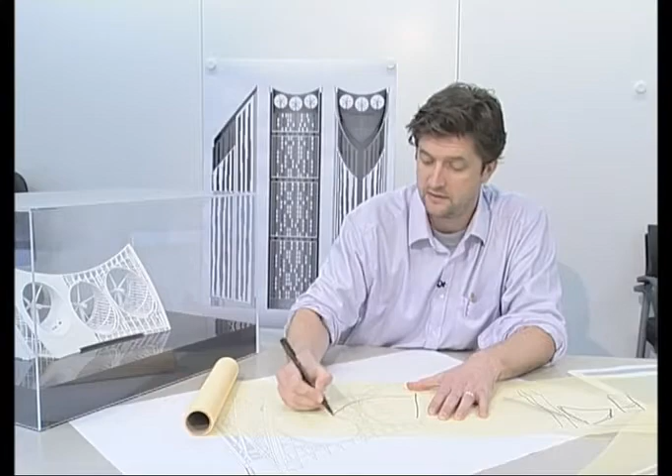Once we'd looked at the different options that were available for renewable technologies, we chose to go down the wind route. There were a number of interesting factors that all started pointing towards wind. One, the speed of wind actually increases exponentially as you get up in height. So remember, we're 150 metres in the air. So the wind speed is like 5 times more here than it is at ground level.

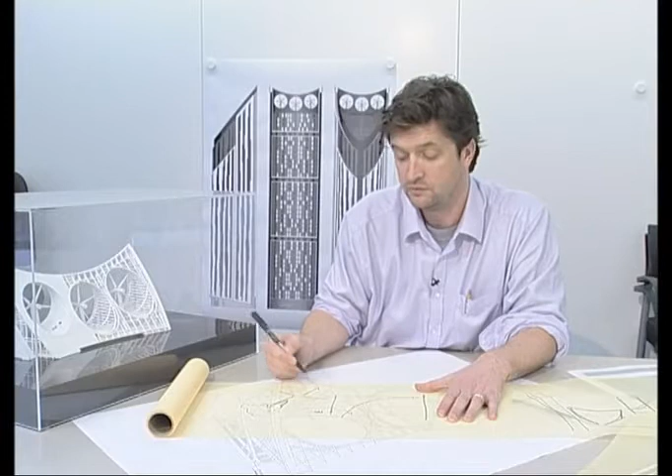The other interesting thing was that if you take the wind rose for London, the majority of wind comes from the southwesterly direction. Now, as it would happen, that curve at the back of the building that I've just shown you, along here, faces due southwest. So the whole back of the building acted like a sail, and it trapped the wind, and when the wind hits that sail, it pushes down and up. So it's actually getting channeled up towards the top of the building as well.

In the early meetings, we were just looking at ways in which we can use renewable energy, looking at all the options. I remember almost the very moment the idea of the turbine was born. I was sitting next to the architect and he was sketching away and just drew this huge turbine at the top of the building and just raised his eyebrows at me to say, can we do that? And without any analysis or anything like that, I just nodded, I'm sure we can make that work, and that's how it was born. And we went from there, really.

The key thing was to incorporate the turbines within the fabric of the building. It would have become tokenism, if you like, to just plonk them on top. There are other examples of where that had happened elsewhere in the Elephant and Castle, and basically we wanted to adopt them as part of a motif of the building.

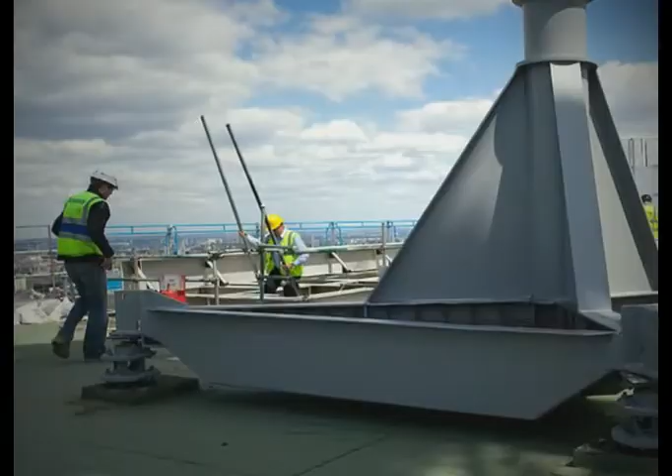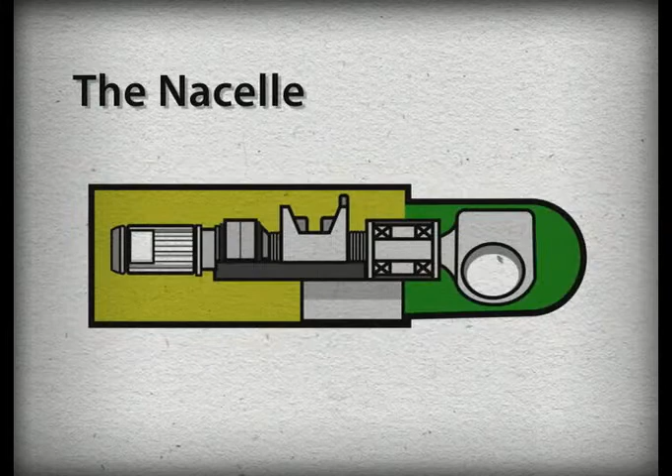Each of the 3 9-metre diameter turbines is a horizontally mounted propeller consisting of a heavy steel and concrete inertia base. Anchored to the base is a 500mm diameter, 6mm thick steel mast that is tilted 12.5 degrees forward to ensure the blade tips can't hit the mast. And fixed to the mast is the nacelle. The nacelle houses the turbine's generator, its gear, the braking systems, and all the couplings and cables. And finally, the hub, which houses the main shaft and bearings and the blade mounts for 5 blades.

But why 3 turbines? The reason we have 3 turbines at the top of the building is 2 factors. One, as I explained earlier, the overall height of the building had been dictated by this view. The quantum of floor space had been dictated by the client. That left us with a space between here and here in which to put the turbines. It's true to say that the output of turbines is exponential as well.

The bigger the diameter, the greater the output, so there's an exponential curve on that. And we could have had one 15-metre diameter turbine and we would have got the same output as the 3 turbines here, but we were sandwiching what we could in between 2 defined criteria. That's where we ended up with 27 metres of turbine.

We tested the performance of the available wind energy by using CFD, that's computational fluid dynamics. That's sophisticated computer modelling to look at the airflow regimes around the building and the additional air velocity that went actually through the turbine areas. The turbine areas are actually 9-metre diameter, but we've got a Venturi type effect by smoothing the entry points slightly on each of the turbines themselves, so they essentially capture and smooth the air through and accelerate across the turbine blades, therefore improving the performance and efficiency.

In fluid dynamics, a Venturi effect occurs when flows are constricted. At the point of constriction, the pressure differential causes a rise in velocity of the fluid. This is what was envisaged would happen in the tubes housing the rotors, but at Strata, the top of the building is sliced off, and the turbine tubes are too short to generate a true Venturi effect.

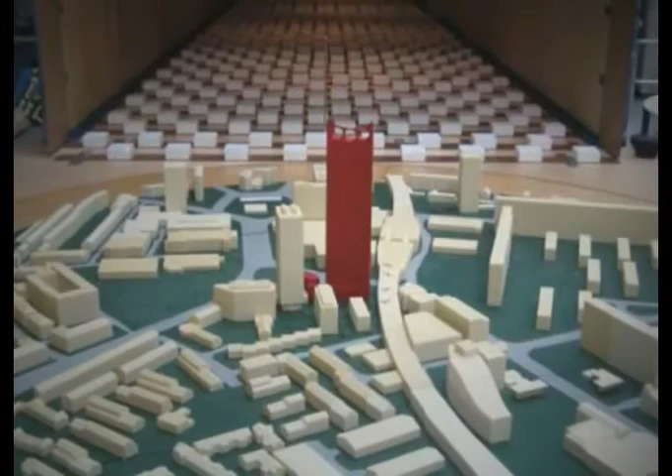Through testing, it was found that 5 blades, as opposed to 3 or 4, was the best performance in terms of lowest noise and the most efficient generator as well. There's a balance always between noise, efficiency, peak performance and cost. 5 blades will clearly cost more than having 3, but then the other issues need to be weighed up as well. One of the issues was what happens if the blades break and come off.

If you've got a wind farm out in the middle of a moor, that's not highly populated, and that's one thing. If you've got a load of people around, that's another. That was looked at very seriously, clearly, and that's resolved by having a steel strand down the centre of the blade, so that if the blade was to fail, then it's actually held in position. And there are all sorts of vibration monitors in the turbine itself as well, which identify if there's a problem, and brakes go on. There's at least an electric brake and a disc brake, so that the whole thing can be stopped fairly quickly if there's any sort of issue.

There is noise. We have an advantage that we have enclosed them within the Venturi-like enclosures. That tends to basically contain the noise into 2 sound cones, one that projects to the north of the building, one that projects to the south. If you've got a conventional wind turbine on a sort of wind farm, the noise would emanate spherically.

Basically, each wind turbine sits on an inertia base, akin to putting a concrete block in the bottom of a washing machine. It dampens the movement. So that inertia base is anchored to the structural slab. It's separated vibration-wise through a series of inertia pads that are adjustable. And basically a safety factor of 10 was built into it, so that whatever the acoustic eventuality was likely to be, we then designed for 10 above that.

This little model here is a model that we used initially to describe to the client and to all the other parties involved in this design how we'd actually build this thing. Because obviously nobody had done this before, and by seeing a 3-dimensional model you can actually understand how this whole thing comes together. Initially when you show sketches, they say that's fine, but how do we actually build it?

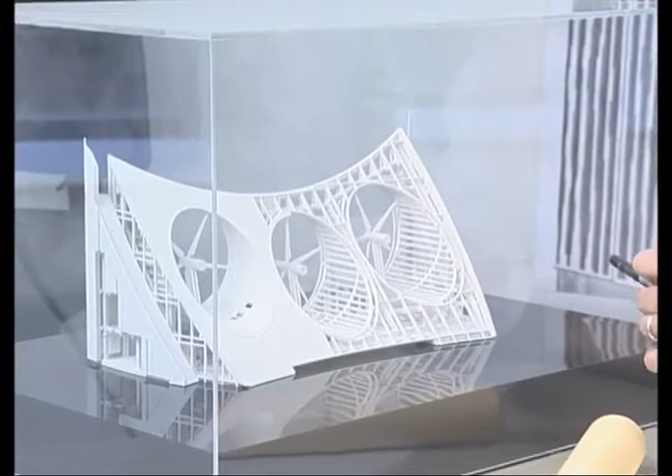So if you look at this model in detail, it has all the relevant component parts of the turbines, the Venturi-like enclosure, that steelwork, and all the steelwork for the overall top of the building round here. And you can see it as it stages from the concrete floor. Everything from here on up is steelwork. Moving over to here, how we actually clad both the building and the Venturis with all the access points required, because this is a highly maintainable piece of kit.

Well, it's a challenge building anywhere in London, mainly because of the congestion. You've got to take into consideration peak traffic flows, how you're going to get people and deliveries on and off site. London is a challenging place to build no matter what size of the building and whether it's got turbines in it or not. This site presented some significant challenges in that it is a very small footprint. We are exactly 3 metres off a major Network Rail viaduct.

We're 43 stories above that, so we presented a fairly significant risk to that Network Rail asset. So we had to have a very good understanding at least 14 weeks in advance of doing anything here on site so that we could gain approval through Network Rail to do basically any type of build work. So that in itself was a challenge.

And I think because we are 43 floors, and it's not that common in London to have 43 floors, choosing your vertical transportation and positioning of that vertical transportation is a key to the success of the building. So it's how you get men and materials up and down site without any impediment to the progress of the build.

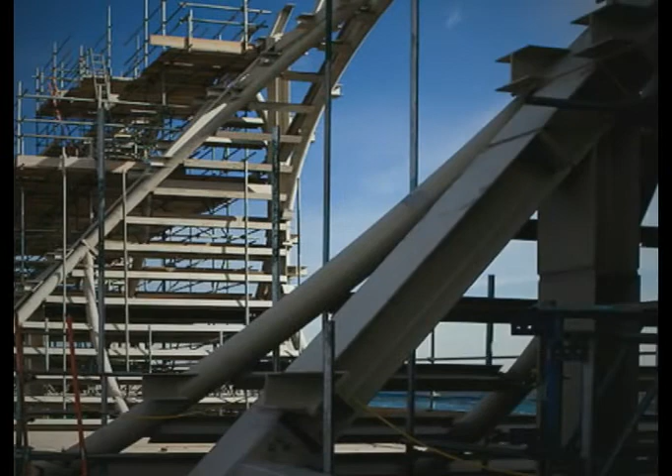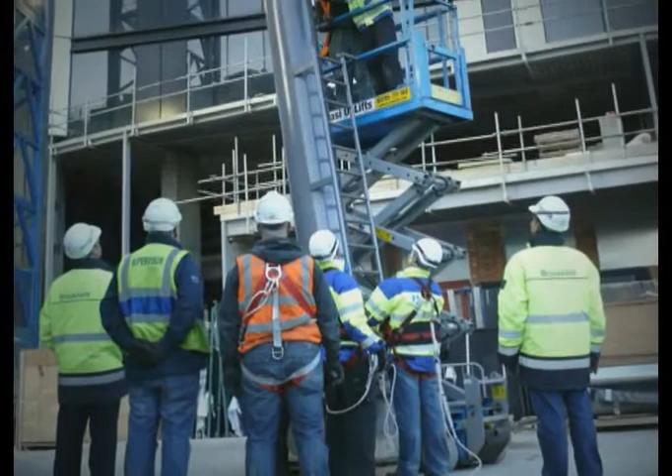It was definitely a coordination dilemma, which we eventually overcame by deciding to put all the steelwork and the secondary steelwork, fabricate it, and then install it as if we were 150 metres in the air, but on the ground on an empty airstrip. And we basically placed a mobile crane where the tower crane would be, and we all pretended we were 150 metres in the air. So we were sitting on the ground, but all wearing harnesses.

So that in itself allowed us to bring the steelwork, which would eventually house the turbines, to site with an air of confidence that we could install it, and moreover, install it safely.

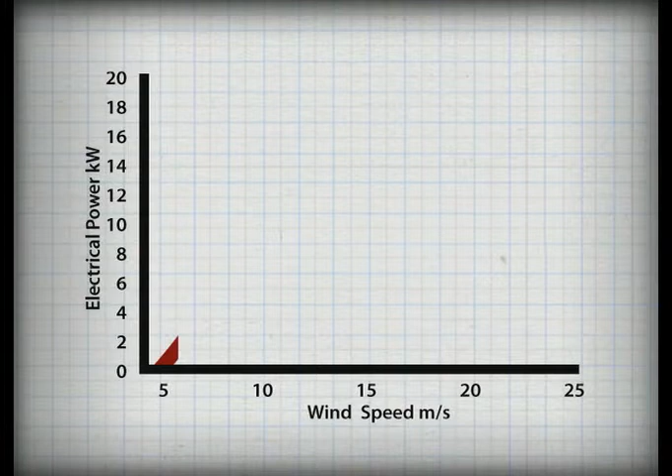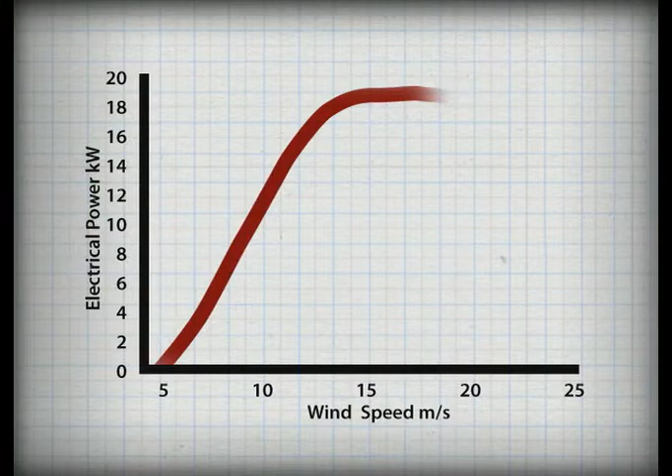When wind speeds reach 6 metres per second, 2.1 kilowatts of electricity is generated. Peak performance occurs when speeds hit between 14 to 19 metres per second, at which point each turbine generates slightly more than 18 kilowatts. However, the turbines rarely turn for prolonged periods of time, not least because the blades are not multi-directional. They can only rotate when the prevailing wind is southwesterly.

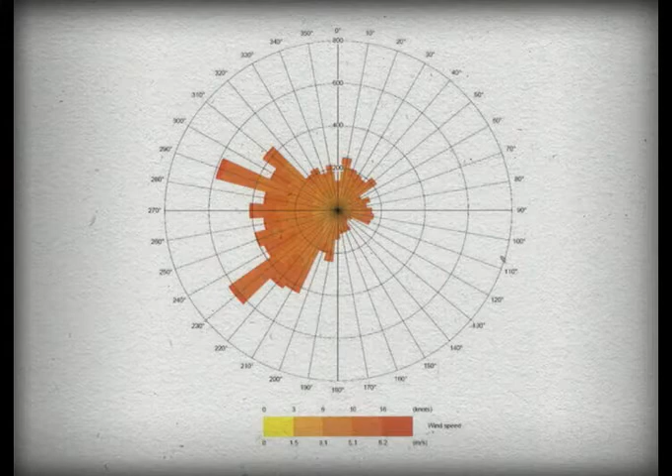And even when the wind is southwesterly, for safety reasons, the blades are designed to act as brakes and to stop turning when wind speeds reach 20 metres per second. Furthermore, when access to the roof is required for cleaning and maintenance, the turbines are automatically shut off. Even with these significant restrictions, it is calculated that the turbine should generate 50 megawatt hours of electricity every year.

Because we can't store wind energy easily, we use whatever is produced immediately. There's no special requirement for plant, it's just an interface module that synchronises the electricity generated from the generator in the nacelle and then feeds it back into the building grid.

I think the thing was for us, it suited the criteria that was of the time, the 10% renewables. This contributes conservatively 8%, but don't forget that's 8% of them running 24 hours a day, 7 days a week. And because it's wind, that's not going to be the case.

Brookfield and ourselves have treated this more as an experiment, if you like, wearing your sustainability heart on your sleeve, and sort of saying that we're not going to commit to what they are going to do. What they are doing is they've partnered up with South Bank University. They're basically taking weekly readings of the turbine output,

comparing that against the weather reports, and in 2 years' time they're going to look to publish a white paper that actually says these are the results that we've actually collated from these wind turbines that will either prove or disprove the appropriateness of urban wind turbines.

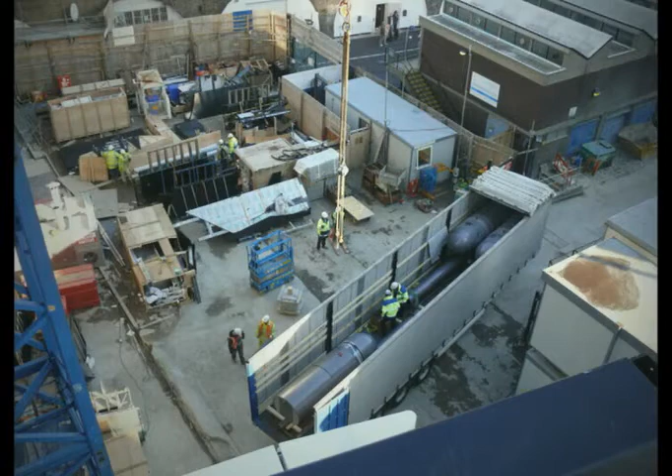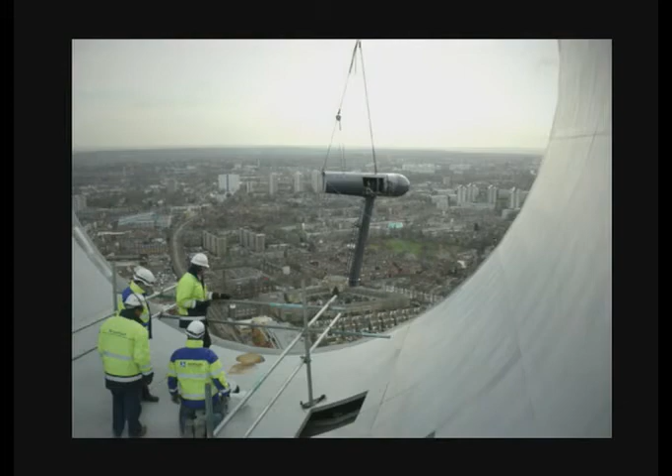So our design team would get a little bit further, but we couldn't take it to the point of fruition as far as design until we had engaged a turbine company. And obviously, because it's the crown of the building, it is not high on the priority when you're trying to get the frame up. So it was definitely a challenge for the design team.

The building isn't all about the turbines, it never has been. Buildings are complicated things that take in a whole number of different components to actually make the overall end product. This is one component. If we wanted to build the most efficient wind turbine, we wouldn't have had a 43-storey residential tower underneath it. We would have built it somewhere else entirely.

The whole thing would have been an engineering project, not an architectural project, and it would have actually then sort of given you the most economic wind turbine in the world, but there wouldn't have been 408 apartments underneath it.